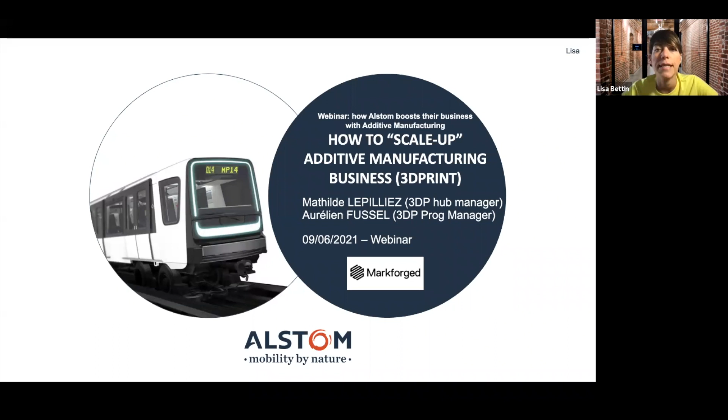So now that we know a bit more about you, I would like to introduce you to our speakers today. First of all, I am Lisa, and I am the marketing manager for Europe here at Markforged. We also have two other people from the Markforged team here with us today. We have Fabrizio, who's the sales manager for Southern Europe, and Jocelyn, who's the application engineer for Southern Europe. And I'm very happy to introduce you to our speakers coming from Alstom, Mathilde and Aurélien.

Mathilde is the 3D printing specialist at Alstom, and she's based in the Valenciennes site in the north of France. And Aurélien is the 3D printing program manager at Alstom, and he's based in Paris in Alstom HQ. And now I'm very happy to leave the floor to Aurélien for his presentation.

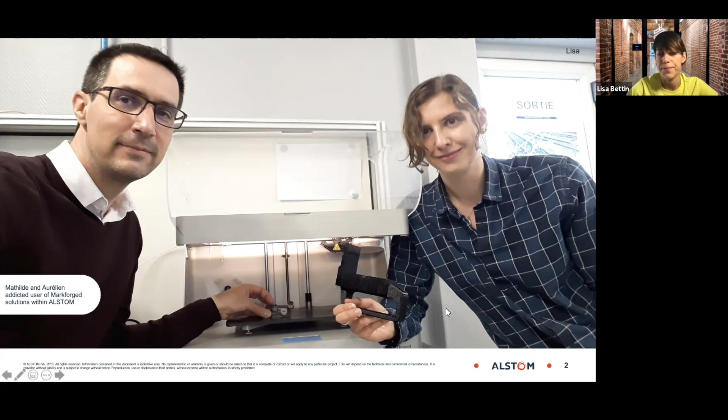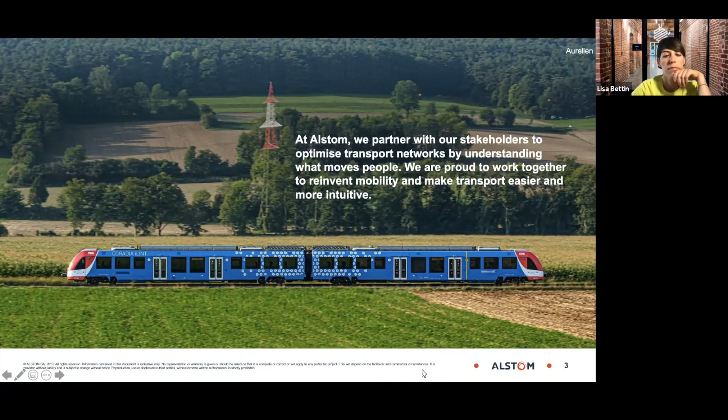Hello, everyone. I'm very happy also to be with the Markforged team and with all of you. Quickly, I would like to present briefly what is Alstom. You know that we are proposing smart mobility solutions, green smart mobility solutions. We are also a key player for the railway industry, and we are presenting a lot of innovative solutions. Since 2016, we have the ambition to propose 3D printed parts to our facilities and also to our customers, internal and external ones. And that's why we are here today to present you the update on this strategy.

Some key figures. We are more than 70,000 people all around the world. Our footprint is a global footprint with several regions. As Lisa said in the introductions, Mathilde and I are located in the Europe region, in France. And regarding additive manufacturing, we have several patents dedicated to this new technology, to try also to secure our knowledge and skills.

Let's now switch to what are the technology possibilities and opportunities for Alstom. So thanks to the 3D printing R&D program, we succeeded in mastering the tooling, mockup, and prototyping. And we also have aluminum 3D printed parts, safety ones, validated by our historical operator, that are now rolling on trains. Okay.

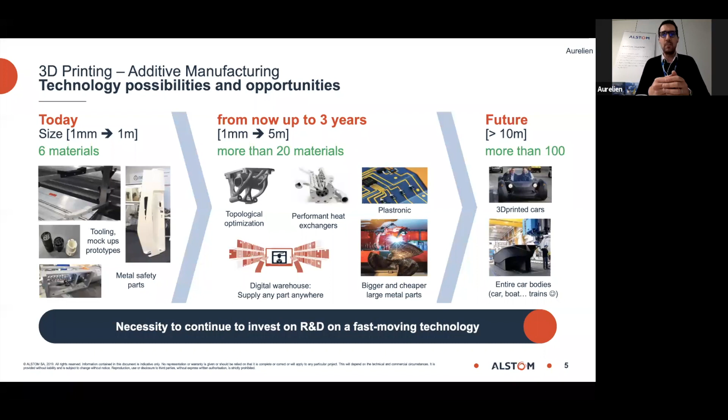Thanks to the technology, we also work on digital warehousing to be able to propose the 3D printed part whatever your location in the world. In the future, you know that it goes faster and faster, bigger and bigger, and we will follow this trend. That's why it's very important to invest in this topic. Next slide.

Regarding, people often ask me what is the digital maturity of additive manufacturing. In fact, we have 3 main businesses in Alstom that are using additive manufacturing: tooling and proto, spare parts, new design. On the first one, I would say it's close to a no-brainer. When we decide to do prototyping and tooling internally, a make strategy, it's affordable for everybody. We win money and time, and we are now spreading the good news and the adoption of this technology through the regions. And it is business as usual for several sites, like for example Valenciennes, where Mathilde is located.

The spare part is, I would say, now my new challenge. In the next 3 years, I will have to develop this topic, this business, with all the knowledge and the skills we have internally. And for new design, each time the design office decides to go for additive, it's for performance enhancement: pressure drop reduction, noise reduction, less weight. Even if sometimes the cost is higher, it's a global total cost of ownership that is analyzed.

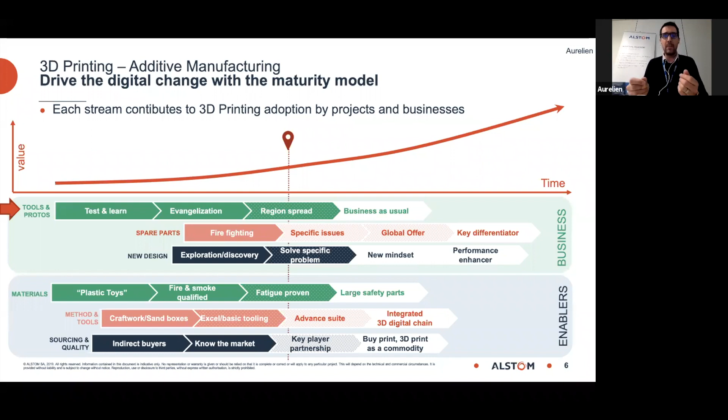Let's now discover the stream. Yes, next slide. So regarding the stream, today the good news is that all the platforms, and what is a platform? It's a light rail vehicle, high-speed trains, locomotives. All the platforms are onboarding additive manufactured parts. As I said, we are doing tools, spare parts, new design. In this webinar, we will focus on tooling, even if we will speak briefly about the two other topics.

Mainly for jigs, a good application, a good material is Onyx or white nylon. Maturity is very good, very high. Each time we are winning money. As I said in the introduction, it's a no-brainer. And for end-use parts like spares or new design, we are very interested in continuous fiber use, whether carbon or glass fiber. It is strong as metal, and it also helps us reduce the weight of the parts. And this will be explained by Mathilde.

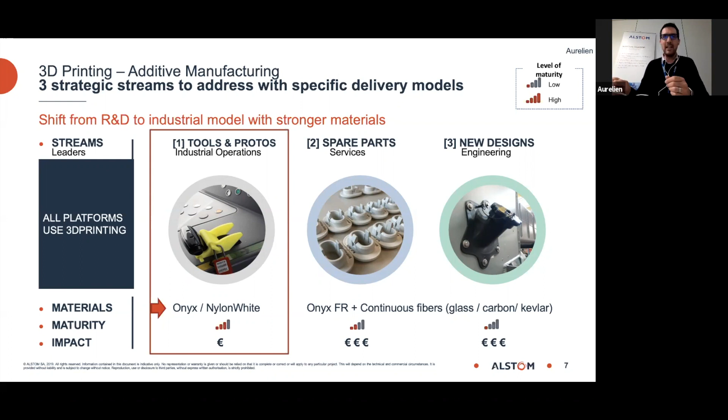Now you will see. So Mathilde is working in our team of specialists and experts. She has high-skill knowledge of additive manufacturing. So Mathilde, please present us a golden use case you developed in Valenciennes. I leave you the floor now.

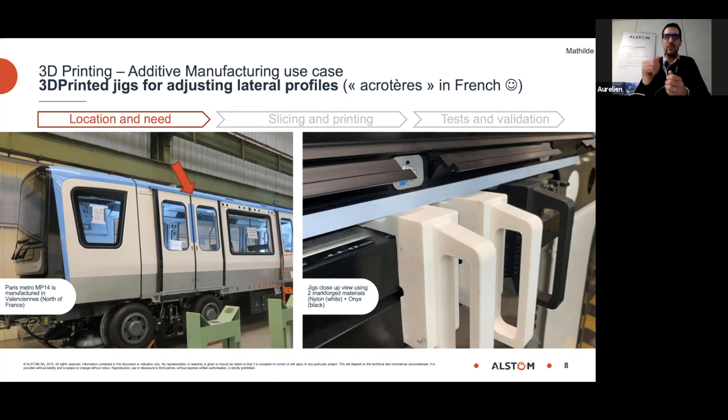So it's on the metro for Paris. It's a tool, and this metro is manufactured on the Valenciennes site. The purpose of this tool is to adjust the lateral profiles on the roofs, you see it with the red arrow, and it's to avoid the bending of the profiles.

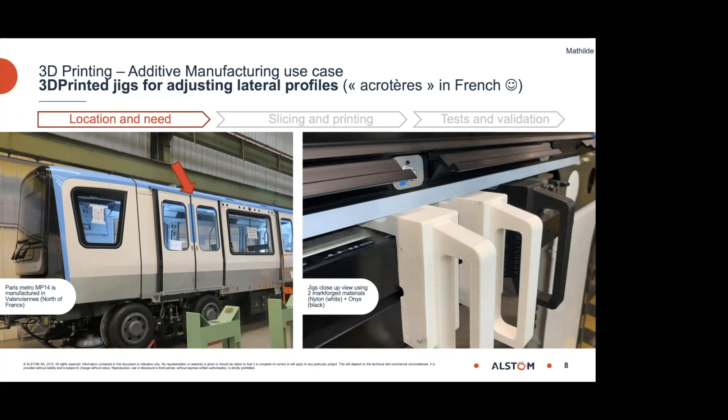The first part was designed in 2016. It's still used on the line, and they requested a duplication in 2020 because of the increasing pace of manufacturing. So they requested 2 more parts, and we did it. As you can see on the image on the right, there are 2 in white nylon, so PA6, and 1 in Onyx. So in this case, we made it in white nylon. Lisa, can you go to the next slide, please? Thank you. So in white nylon, we add some continuous carbon fiber in the wall to ensure resistance.

The most important point of this tool is we have to add magnets to avoid the fall of the tool and to avoid hurting operators. So to do this, in the design, we made 2 holes. The dimensions are the magnet's diameter plus 0.5 millimeters.

And it's possible thanks to the Markforged 3D printer, because first we are able to make a pause. So the 3D printer will keep the good temperature of the printhead. And also we are able to take out the bed of the 3D printer and to place it at the exact same place in the machine. So the print head will continue the printing at the exact position.

So as you can see here, the total printing time is 1 day and 4 hours. The pause is at 1 day and 2 hours. So at this point, I just have to take the bed out, remove the support inside the part, add the magnet, and put back the bed. 2 hours later, the part is ready.

So another strong point is we are able to add off-the-shelf components, like here a magnet insert. So this is really good for purpose. So can you go to the next slide, please?

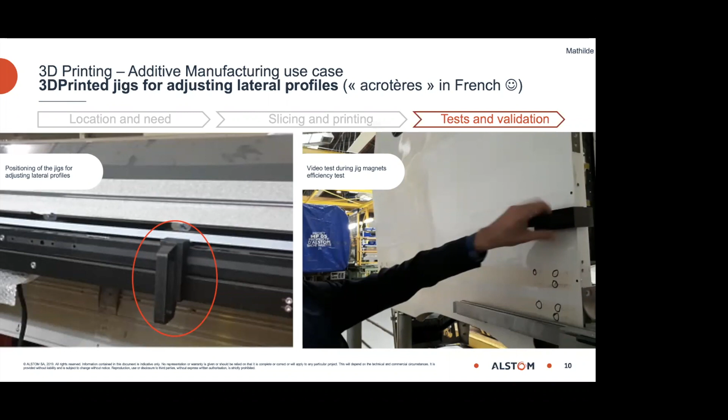Thank you. So as you can see, it's a very good tolerance to ensure adjustment of the profiles. And this is an important point for tooling. When people request tools from me, they request some tolerance, and I have to respect that. It also has a very good resistance, and it's important because it's used every day. And since the pace of manufacturing is important, we need the tools not to break during the day.

And as you can see in the video, using this tooling, there is no damage on the car. The metal is good, the paint is still good, but the magnet is strong enough to ensure there is no fall and to not hurt the operators. So here's this use case. So I'm proud to be able to help our operators and the company with 3D printing and to be able to answer very quickly to their requests and their needs.

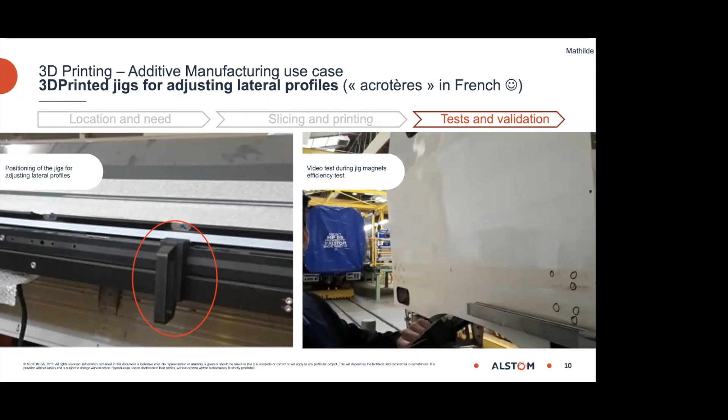So Fabrizio, the floor is yours. Thank you, Mathilde. It's a pleasure for me to be here, and I'd like to thank Alstom for the opportunity.

For me, it's important just to give some details about the core strength of our technology, why it's so different, why it's so unique, and what are the capabilities that you can obtain when you introduce Markforged technology in your production, in your environment. The company was started with a very simple idea. It was to be able to reinforce with continuous fiber a part printed with filament-based 3D printing.

You can see here on the right picture, the yellow is a Kevlar fiber, so it's a Kevlar filament, and it's been anchored inside a part, inside a matrix material, in our case Onyx. And you can see also on the drawing of the printing head the two different nozzles, one for the matrix material, the skin, the shell that protects the fiber, and the other for the continuous fiber that you can layer inside a part to build this inner strength. It's like you can decide how to build the skeleton inside a part.

So if we go on the matrix material, so the base of our part, we have different materials, all produced internally in Markforged. So Onyx is our core material, it's a nylon-based filament, and it's loaded with chopped carbon fiber. So it's already a great starting point in terms of stability, chemical resistivity, and so on. We also produce different iterations of the material.

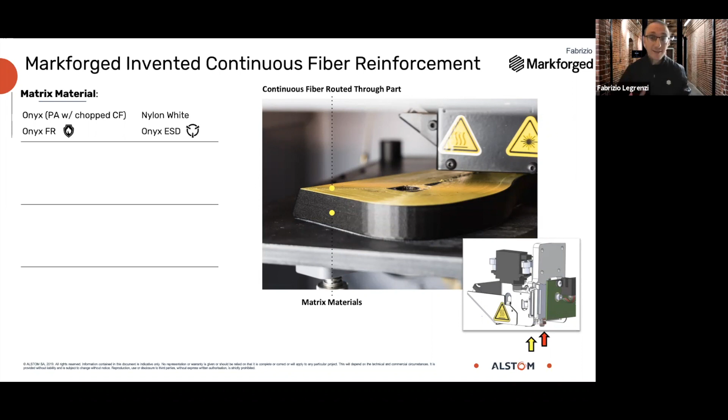For example, Onyx FR, so it's a flame retardant, certified Yellow Card UL V-0 at 3mm thickness, that gives good reliability against flame. It is very important for automotive or railway customers, as Alstom. We also have a new iteration called Onyx ESD. It's a shielding material for electrostatic discharge. So it's very interesting for PCB market automation where current is involved.

So all of these basic matrix materials can be then reinforced with continuous fiber. And we do have 4 of them, because each fiber has its unique properties, and when you use it inside a part it can give you different strength. So carbon fiber is the strongest, the most rigid, the one with the best mechanical strength, and you can often replace aluminum parts for the lightweight and the mechanical strength.

We also have Kevlar, like in this case, it's a bright yellow aramid fiber, and it's a very interesting fiber. It's the same that you use for a bulletproof vest, for example. It never breaks. It can bend, but never breaks. So it's very useful against failure. So you know that a part will never snap, will never break, will bend, will be very safe. And then we have fiberglass and fiberglass high strength, high temperature, for a good compromise between mechanical properties and cost of the fiber.

Well, when you think about composite, you always think about the fabric, the autoclave, the resin. We don't have any of these here. We are just working with the filament. So we also can decide where to put the filament, in which part of the component, what kind of function we want to obtain. Often with 3D printing, we are asked to replace parts or make something through the printer.

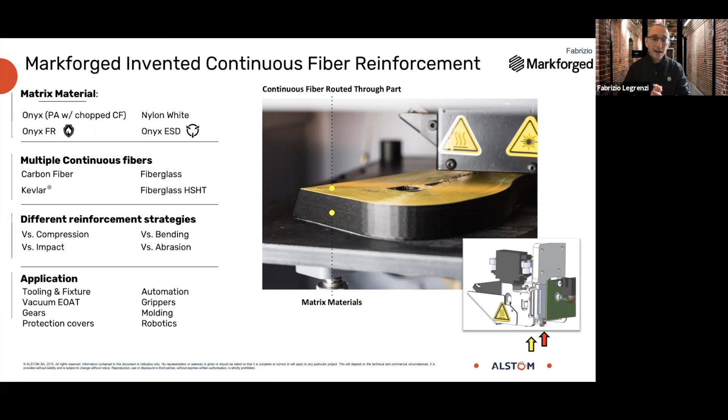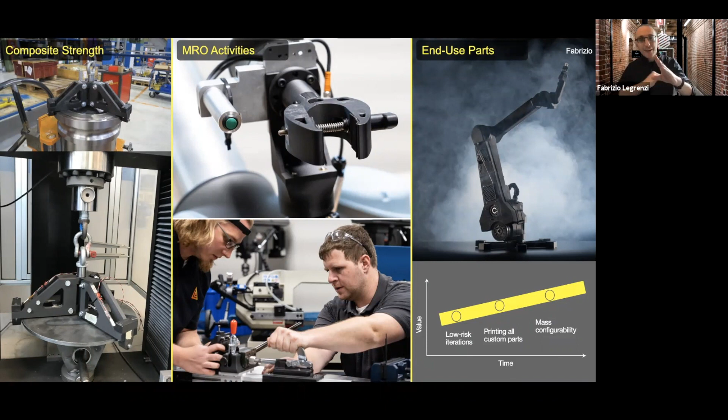With a little bit of optimization in the design to really leverage the strength of the fiber, we optimized this tool from a flat design to this 45 angle that you see in the picture, and you see the skeleton of carbon fiber running through and really able to distribute the load, distribute the weight during operation. We produced the tool. The tool has been tested under load up to 1,000 kilos without breaking, and it's been certified with a safety factor of 5. So it's been certified to lift this 200 kilo piston. What's very interesting is that it's very light, less than 2 kilos as a lifting tool.

So we have seen a case in which this tool was disassembled and put on a drone. The drone flew over the Singapore Bay to reach a ship that was broken down and needed this lifting tool to replace a piston. And the part was produced digitally, because it was designed in Italy, produced a few times in Finland, then again produced in Singapore for the need.

Another very interesting application is the field of maintenance and repair. I know that many companies are able to have a quicker setup time, to build a more resilient and quicker to reply production line thanks to the unique properties of our technology. Sometimes we also know of customers who have an installation where they have to do a repair. They just take the printer and drive it to the site, or they produce the part on the spot at their customer, or even in the hotel the night before a meeting.

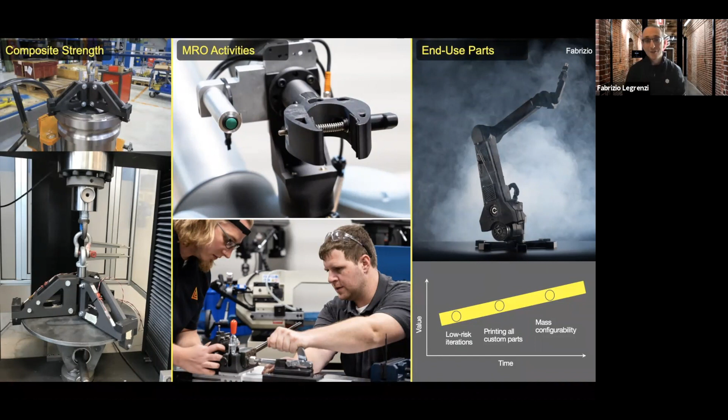Grazie mille, Fabrizio. Merci. Yes, you can see that with the example of Fabrizio, Alstom is, I would say, on the same way. For all the industry, for jigs and tools, it's a no-brainer. It's very cost-effective, and as Mathilde showed you, it's small but smart. You see what I mean? The jigs presented by Mathilde were not possible to do in a conventional way of manufacturing, because we are embedding function and enhancing the toolings. So this is very important.

So yes, as a conclusion for Alstom, 3D printing is a promising, an amazing journey. I'm very proud to share it with our team, our specialists, our experts all around the world. So the journey is continuing. We are spreading the technology all around the world. We will set up new printers in the plants each month regarding toolings. And we have three main topics. We will continue to develop our skills regarding simulation also.

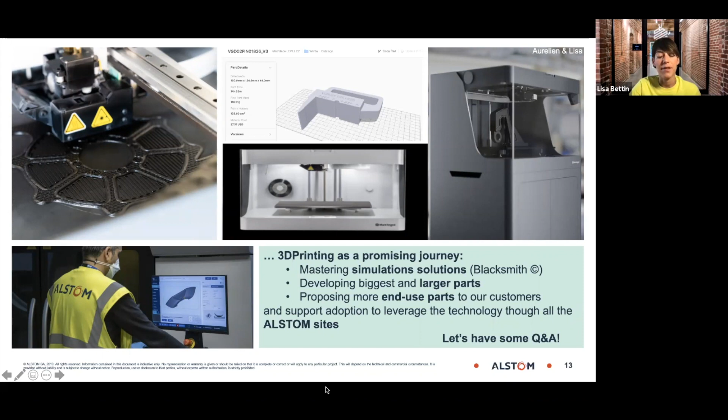Yes, great. Thank you. Very interesting. Let's have some Q&A. I actually have a question for you, Aurélien. What are the next 3 priorities for Alstom in the manufacturing journey? Very interesting question. So regarding the priorities, the first one: we want to push forward the adoption for spare parts. Because we think that today the maturity of the market and of the printers is very high. That's why we can print spare parts for internal and external customers. So the priority is spare parts first.

The second priority is to be sure that the new printer X7 and the other one will be successfully installed. And I count on Jocelyn also to work with our team to deploy that, because we have ESD issues. We need stronger jigs. So this will also be a short-term priority.